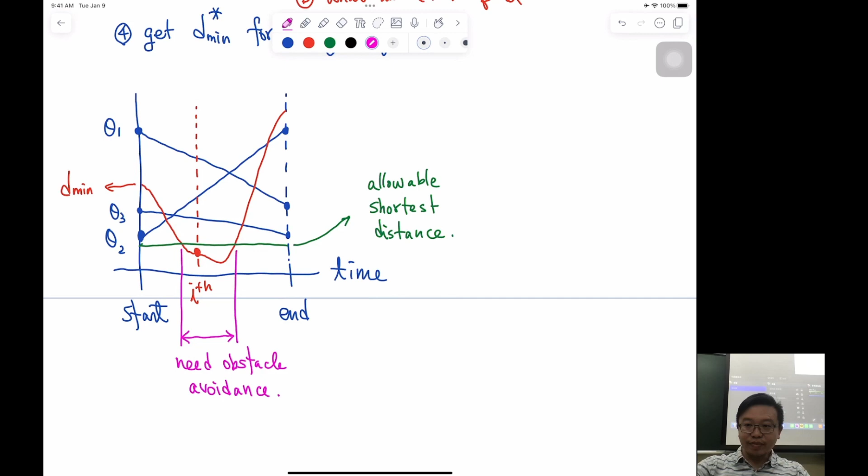Now I will switch to a PowerPoint.

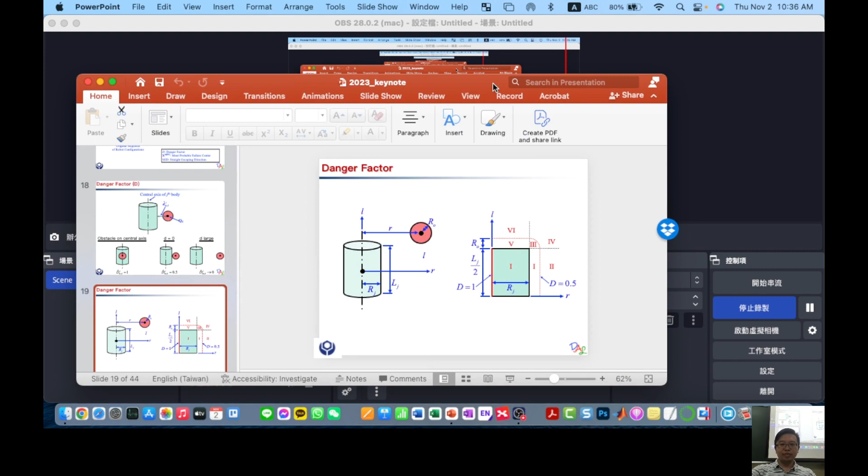I gave this presentation in a very interesting country called Latvia. If you have no idea what Latvia is, that was my first time there because I have an international project with them and also with Lithuania. It's a 3-country project.

What's interesting about Latvia is that they have no mountains. They have flat grounds, a lot of forests, no mountains. Our Latvian partners came to Taiwan this year after COVID and were so excited about mountains, they have never seen mountains in their life. Some of our partners went to Elephant Mountain one day just to experience mountain climbing. For us, it's boring, right?

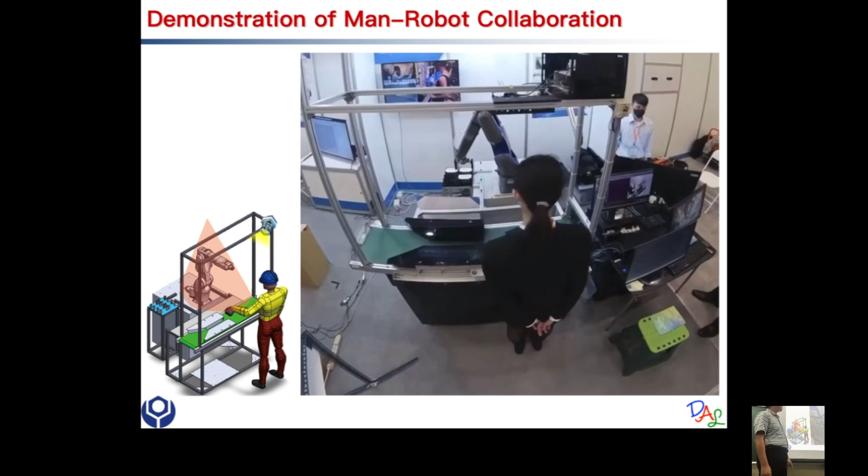It's a National Science and Technology Council project. In this project, this is a student from Professor Cao Longyang in industry management. We don't like to have boys as a model, just beautiful students.

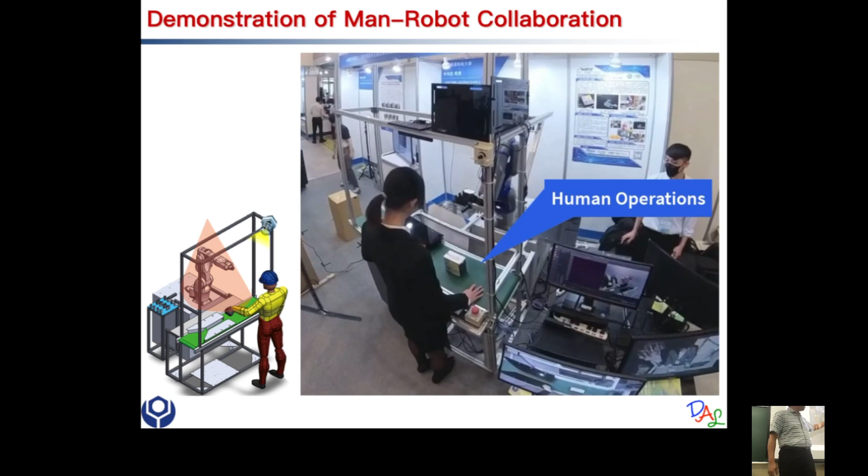The robot is picking up something and is supposed to drop the part in front of the student. She intentionally moved her arm to a certain spot so there could be a collision. From this video, you can tell the robot made a route around the student's hand, because when it realized there was an obstacle, the student's arm was considered the obstacle. Some calculation was done inside the computer, and then the robot was told to stop and move along a different trajectory.

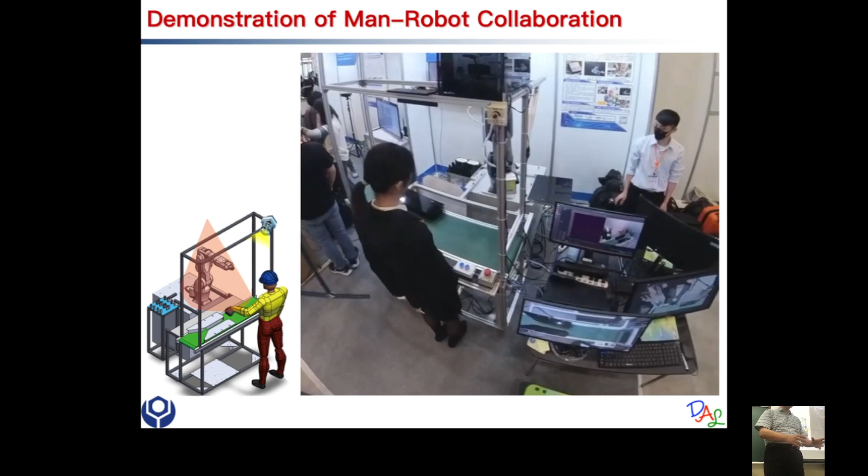For the rest, it's just the other part of the project. Our partner analyzed human motion and realized what is the right moment for the robot to join this collaboration. But to make sure this operation moves smoothly, we put some buttons here. We push the button so the robot knows when to come. Eventually, we don't want the buttons. We want this to be done with some kind of algorithm, so whenever the human completes a task, the computer should know and the robot will jump in and do the next move. But right now it's very challenging.

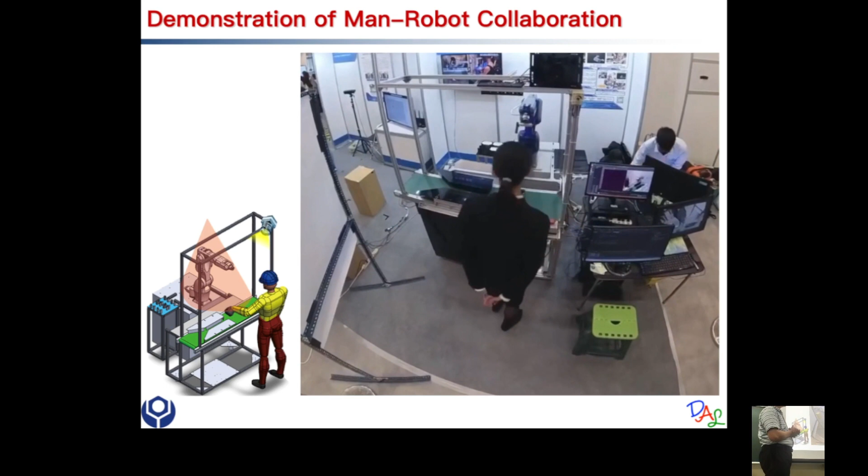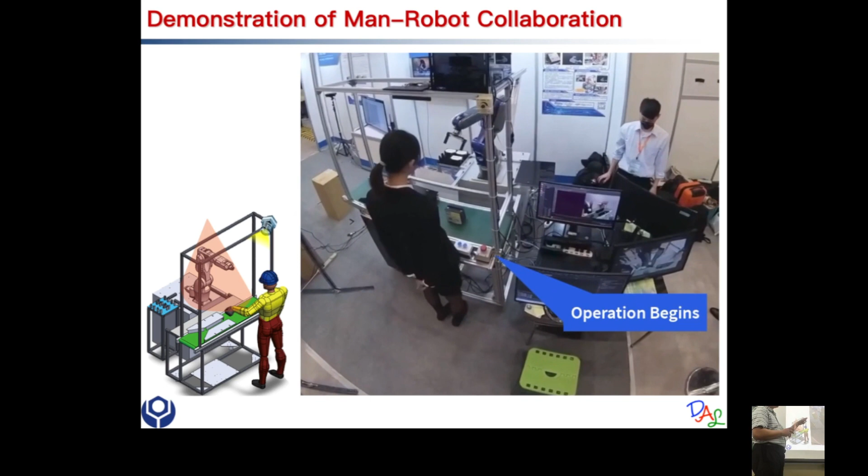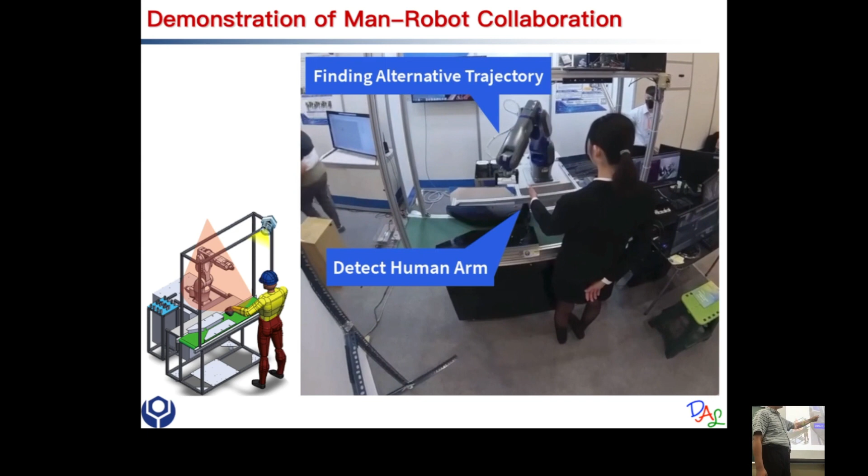Okay, let's see the obstacle avoidance again. I will show you when the robot realized there's an obstacle and decided to move around the student's hand. When she moved her arm forward, look closely, the robot stopped for a very short time and then took a new route. Within that short period, all the calculations were done. Look carefully, it stopped right there, and then took a new route. It was not a smooth movement because it realized, oh, there's some obstacle.

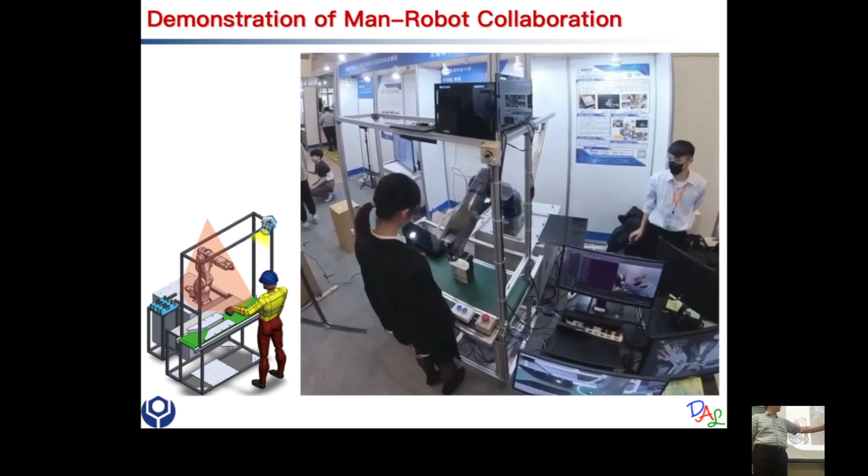Within this research, there are three parts. The first part was done by myself and my students, working on path planning with obstacle avoidance. The other part was done by Professor Chao-Lung Yang in industrial management, who used a camera to realize what the student is doing with human motion recognition. The third part is laser projection.

It's by Chang Ching-Yuan from Taipei Tech. He made one laser at the top. There is actually some laser indicating what the human worker needs to do, like a hint. But it was not clear in the video. If you are close by, you can see the laser. So anyway, this is what we have done.

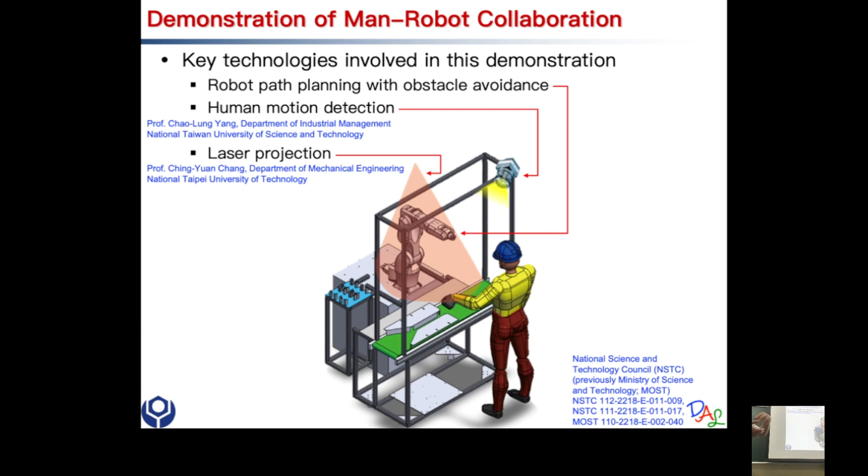Later on, when you work on the project, if you are interested in this kind of topic, you can let me know. I can find my graduate student to jump in and show you what's available and what you can work on.

This is actually the exact procedure I showed you earlier by hand, but this is more like a block diagram. Whenever you have a plan for motion, let's say moving from P0 to Pn, you need to detect whether there is an obstacle. Usually you have some sensor or camera surrounding the working environment, like what I showed you in the video. There's actually a 3D camera recognizing the 3D coordinates of the student's arm. When the arm comes in, all the coordinates are captured and tell the system that along the trajectory there's this particular obstacle.

So our system was basically doing the exact calculation I showed you. Once we compute every future configuration, if you move up to a certain point, you don't need to worry about what's in the past, you just need to worry about what's in the future. The computer is calculating every possible configuration in the future and the shortest distance between the configuration and the obstacle to check whether it's safe. If yes, continue. If no, you need to use something to replace the trajectory.

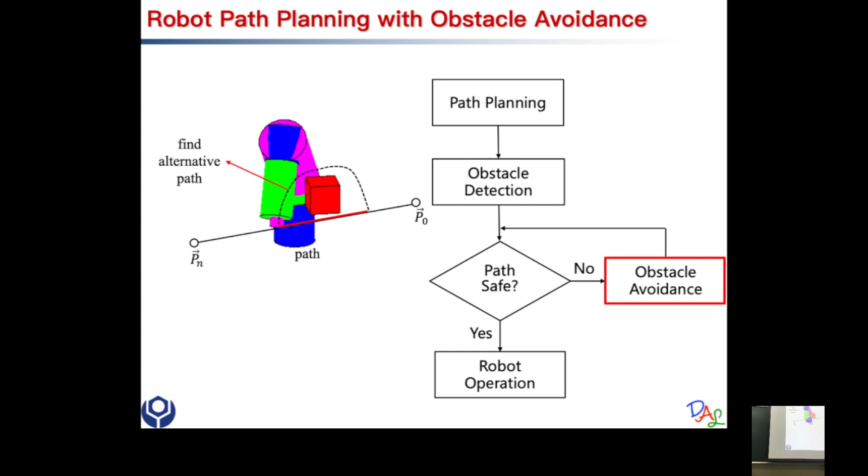Let me tell you what people have done in this field. There is one way, the so-called potential field method, with all kinds of potential fields. This algorithm can not only be used for robot planning but also for vehicle positioning. It's very commonly used, this potential field method. Of course, the assumption is you need to know where the obstacles are.

Those are obstacles, and you have a starting point here, and an end point. So you know all the coordinates. Now, the most straightforward movement is to move straight, right? And as you can see, along this straight line, there's going to be a collision. So in the computer, when we try to do this, we already know there is collision.

Since we know the coordinates of everything, we assign some kind of potential energy on those geometries. They're like magnets—they have opposite magnetic fields, magnetic force, pushing you away from the wall. So when you are about to move up to here, that magnetic field pushes you toward the other direction.

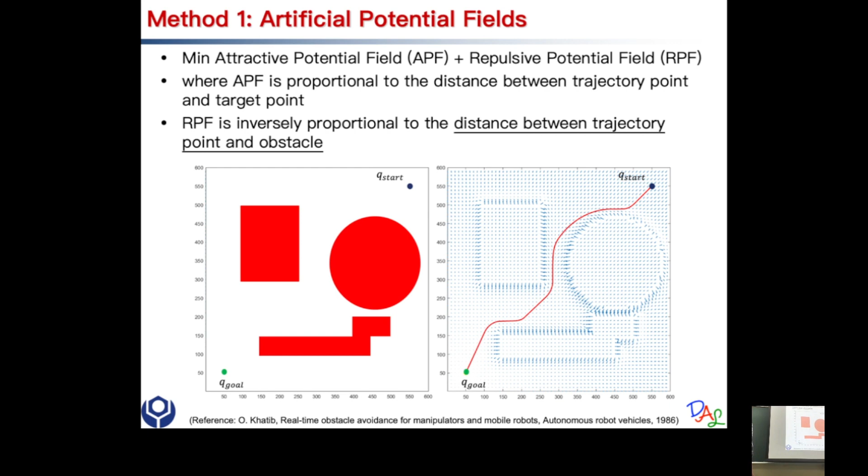A different way is called Dijkstra's algorithm. It doesn't require you to move along the entire design space. It's a flood exploring algorithm. It's like pouring water from the entrance, and the water started to explore until it reaches the target, like a flooding. Once it reaches the target, the computer will figure out how many steps it has been taken. There is one trajectory or multiple trajectories that took the shortest path. Then move along that path.

What's the issue of this? Whenever you explore, you are checking every position, whether that position is safe or not. Whenever you are checking if it's safe or not, you are checking the shortest distance. So every red point requires one time of shortest distance measure. That's also a lot of calculation.

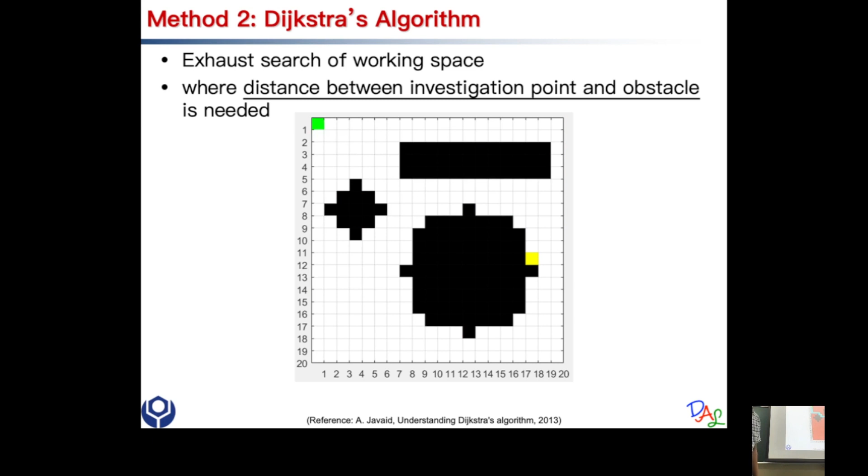The next method is called A-star. It's an improved Dijkstra method. In A-star, they don't try to explore everywhere. Whenever they take a move, in this 2D space, you basically move forward or move left. They have some calculation to decide whether forward is better or left is better. They will decide one, so they always move along one direction.

Up to here, moving this direction makes more sense because it's closer toward the target. But whenever it's bumping into an obstacle, then you need to explore more. Over here it's actually exploring more, some extra exploring, more like a Dijkstra. But it doesn't overdo it. You only explore the space close to the possible path. And even doing this, you are still checking shortest distance.

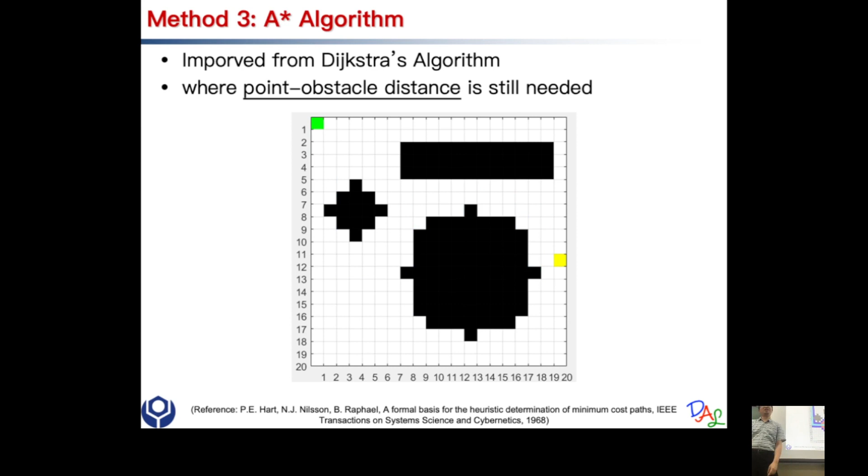From here, people started to try different ways. They try to use a random procedure. This is so-called a probabilistic roadmap. What did they do? They basically assign random intermediate points in the space, just randomly assign them, and then try to connect the dots. They don't connect the long ones, they just try to find the closer ones surrounding every point and then try to connect them.

Whenever they connect those straight lines, they start to determine whether on a specific line collision is going to happen. Over here at the bottom, that yellow point is not a good point because that causes collision, so that one will be removed. Once you have some kind of network that allows a connection between the starting point and the end point with zero collision, then pick up the shortest distance.

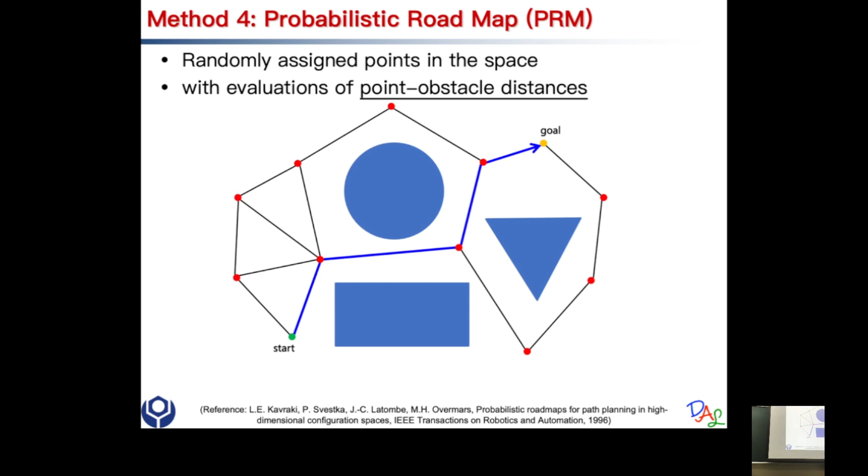So someone came up with this newer, more advanced approach, so-called RRT, Rapidly-exploring Random Tree. The two most famous methods in path planning are A-star and RRT. A-star is easy, RRT's procedure is more complex, but it's quite efficient.

They don't explore the entire space anymore. They start from the starting point and just explore the neighborhood. If there is a bad path, eliminate the bad one. And then you don't pick up the one that's over a certain limit. Like earlier, this one collides, even if it's inside a certain allowable region, it collides with the obstacle. This one is eliminated. This one is outside. You don't want that, you just want to explore the neighborhood.

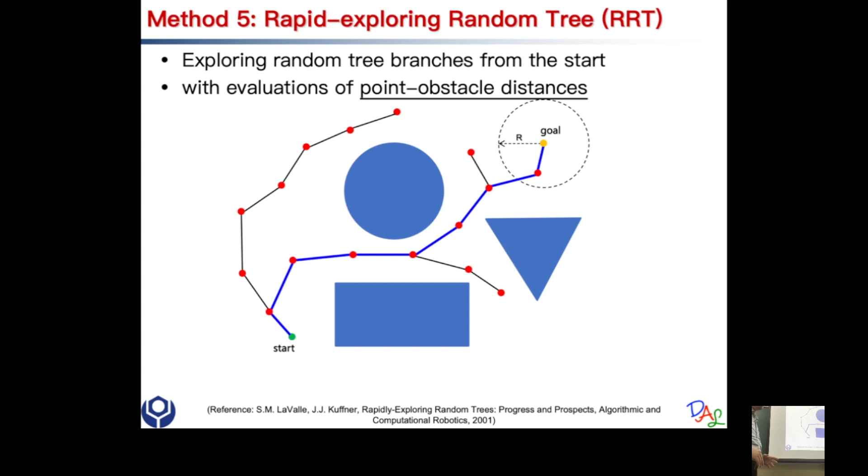So keep on doing that. You could have small branches until you reach a certain area where a point is close to the target, within a certain range. Then you connect the target with the end of the branch, so you find a complete trajectory. Researchers believe with this way, you don't need to explore too large a space. You can go through a smart trajectory.

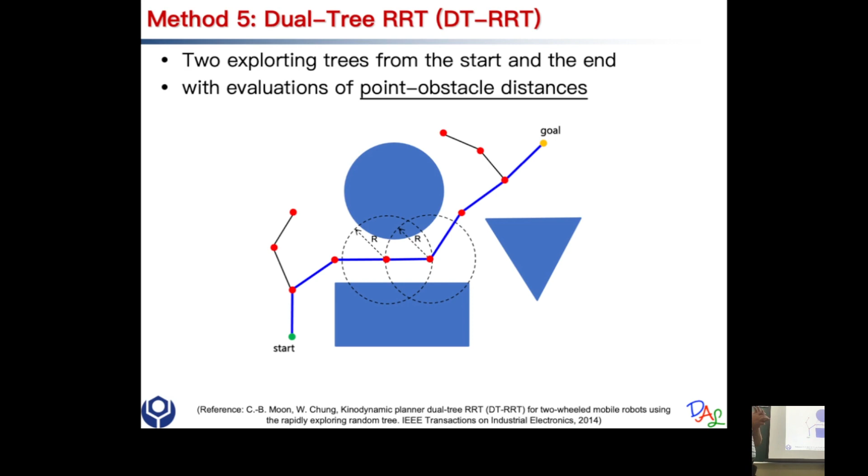Then someone tried a dual tree RRT. Same idea, but they have two branches starting from both the starting point and the end point. Until both branches have a single point closer to the other one, then they connect those two neighboring points so they find a complete trajectory. They believe this dual tree RRT allows you to explore lesser space. You don't want to explore the whole world, you just want to explore what's possible.

Okay, now I would like to introduce what we did in our lab. There's a reason why we don't use A star or RRT. A star is more like an exploring algorithm. It's like you don't need intelligence, you just need to explore, just find a more effective way of exploring. And for RRT, it's based on a random process.

My research field is about optimization. We don't like random process. My advisor and my advisor's advisor, we never use random. We don't like to use random points. We would like to derive

algorithms that help you find a solution. So if you want to know more about what I'm planning to do, you need to take my optimization course. If you've done it, basically the difference is there's a bunch of algorithms based on so-called gradients. The other ones are based on random process. We don't use random process.

Only the weak students use random process, like a genetic algorithm. When you publish a paper, if you use genetic algorithm, the other group of people will think this is nothing smart. So we want to develop something that's smarter.

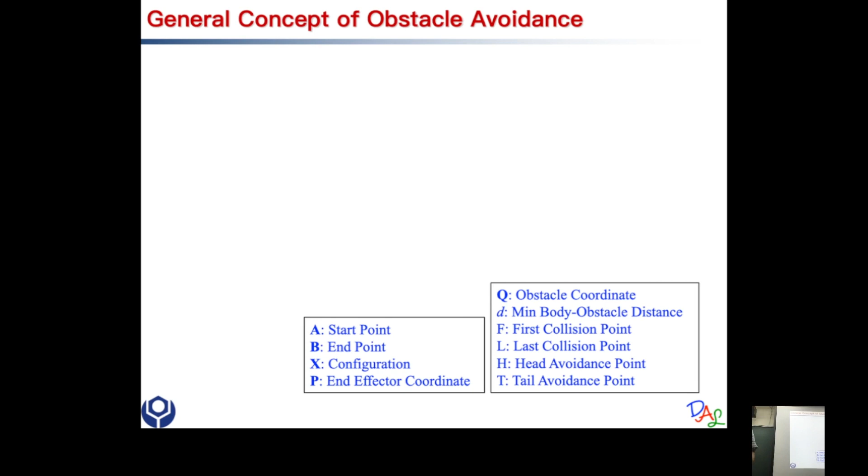Okay, so in general, you are moving from this, basically P0 to Pn. And it's a general configuration, so the robot can have any shape. This is the jth body, like I said, and this is the coordinate of the end effector. X represents the joints, a vector of joints, basically the configuration. So let's say there's an obstacle Q on the way.

At a certain moment when your robot configuration has the first contact, I'm calling this the first collision point, so F represents first collision. The robot keeps moving until it reaches a certain configuration like this, and if this is the last configuration that has collision, the next moment it moves, the collision finishes. So I have a first point and a last point.

So I define this as a robot collision region. We want to avoid this part. However, if I move my robot up to here and start to make turns, you already have tangent contact. You don't want that. So in our research, we usually find a configuration a little bit earlier, away from the collision.

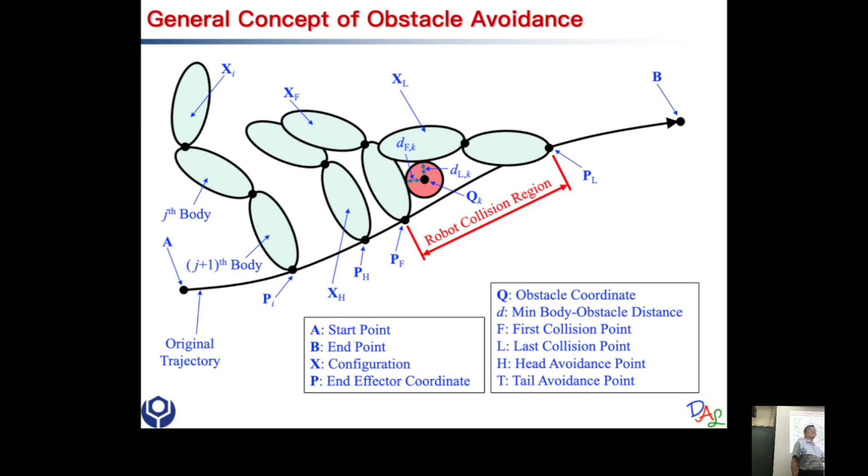Because we already used first and last, over here we use head and tail. So this is the head point to avoid the collision, and then we find a tail point. This is the tail point, head and tail. So we define this region as the obstacle avoidance region.

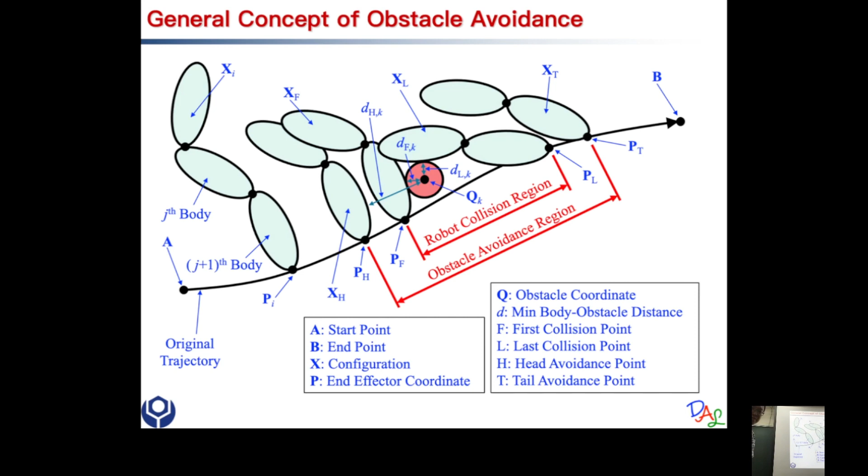If we are able to find a trajectory that is away from the danger region, we won't have contact, and also we can move around it. So let's focus on this obstacle avoidance region.

Over here, we pick up some intermediate point here, some intermediate configuration. The idea is that we basically want to find a newer configuration from here to here. So here is not safe, here is safe. If you can choose multiple points here, then you can find multiple newer configurations above it, then you can just connect them.

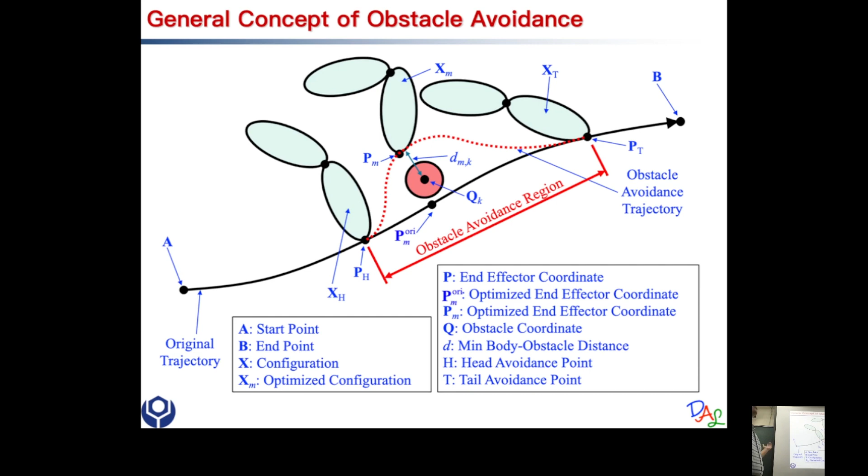So that was the idea. We focus on one configuration and find a safer one to replace it. Okay, so that's the goal. If you can find one, then you can find a lot of them, just connect them later on. So from now on, we are going to focus on just one configuration within this obstacle avoidance region.

Now here's the trick. We don't want to deal with the end effector coordinate anymore. From now on, when I do any analysis or optimization, I stick with the configuration coordinate, basically a vector of joints. Why do I do that? Because I don't want to do kinematics anymore. If I use the end effector coordinate right here, then in the later analysis, I need to do inverse kinematics

for x and then forward kinematics for p. I will need to do this back and forth so many times. I don't want to do that, that is wasting some time. So let's focus on the design coordinate with x. If it works, I never need to do kinematics anymore. So the idea is I need to find a newer point right here to replace this one. But this one was a good one, the only bad thing about it is that it will collide with the obstacle.

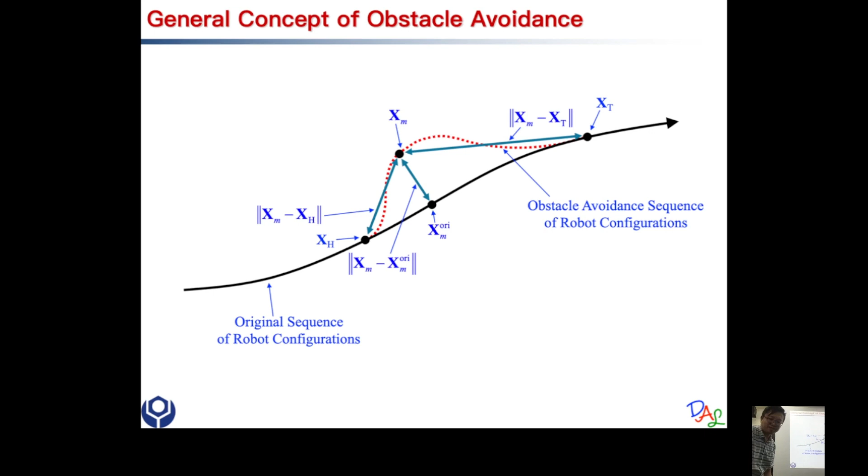Basically, that's a lot of math, so don't worry about some of the math. Basically, over here, that's where it's dangerous. So we want to evaluate something called the danger factor. The danger factor is going to be calculated by the shortest distance.

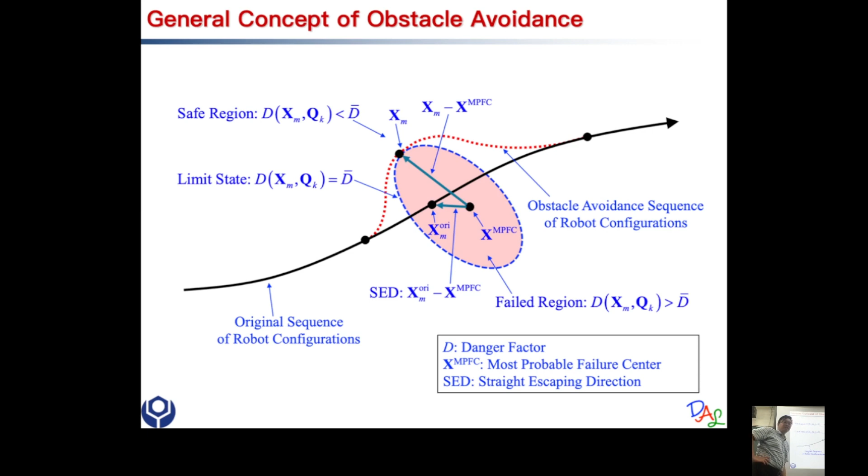I want the danger factor to be small enough. If it's too high, we believe it's dangerous. So I will tell you about the danger factor. So it's the exact same analysis that I did, but this time I choose to use the so-called danger factor.

There's a reason. Because robots may have large ones or small ones. For large ones, maybe you are in a different scale. The large ones could be 2 meters tall. Small ones could be 50 centimeters tall.

So when I apply a general method to robots with different shapes, I want a unified unit. I don't want the analysis to be affected by the size. So usually when this situation happens, sometimes we would like to normalize our values. We choose to define a new value called danger factor.

Whenever the obstacle is right on top of the center axis of the cylinder, we say this is 100% dangerous. So danger factor equals to 1. Whenever the obstacle has tangent contact with the cylinder, even it's like this, or corner points, or on the side, whenever it's like a point connection, we say this is 50% dangerous. When it's away, 0 dangerous.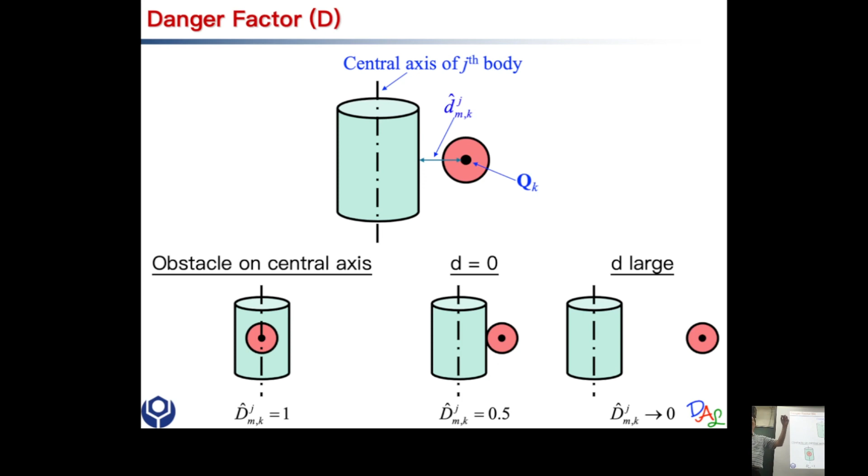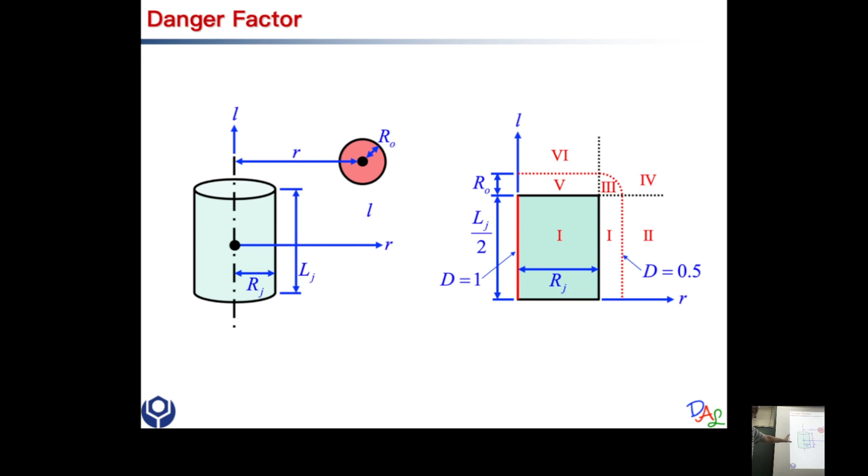So if we can model this danger level with values from 0 to 1, it's a unified number, no unit. It's just a percentage. So basically, exact same calculation, but over here we need to cut into 6 regions, unlike what I showed you earlier. Because we did some math to realize the danger factor has to be written in certain equations.

It's more complex than the one I showed you. The handwritten one is a simplified version. This is a more complex one because of the danger factor. Okay, so what's this?

That's how the danger factor changes when the coordinate of the obstacle changes its coordinate. So I would like to show you what this means. So this is an exact drawing. If the center of obstacle is on this red line, danger factor has to be 1, right?

So pay attention on the coordinates, the L. L is the axial direction of the cylinder. So L in this figure is right here. So here is L. So this edge is representing this red line. Okay, up to one half of LJ. This is 1/2 of LJ, right? Up to here, within this range.

And R equals to 0. This is R equals to 0. So over here, this is like the obstacle staying on the central axis. And like I said, I want this danger factor to be 1. So these are danger factor equals to 1. Okay? And when the obstacle center is staying on top of the red dashed line, we will have point contact with the cylinder.

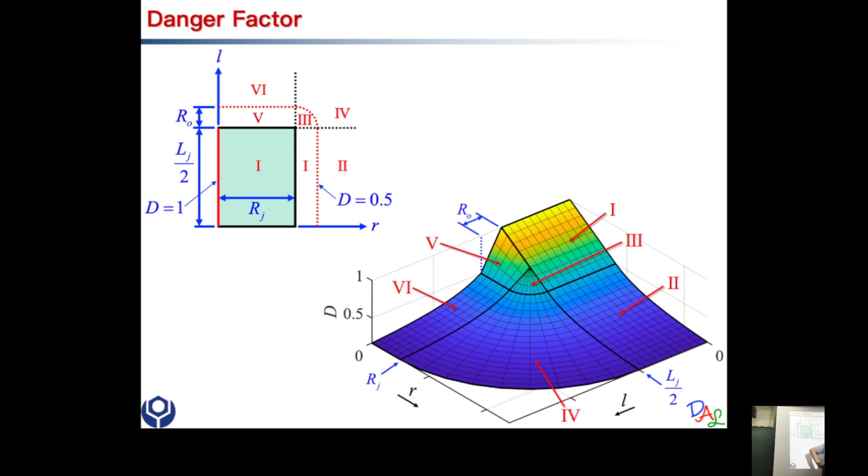So we designed this danger factor within 6 different regions with those equations. We try to make this danger factor as a smooth function. But it's not completely smooth because we have some corners right here. It's not good for derivative, I know, but it works okay. At least this function is well defined everywhere.

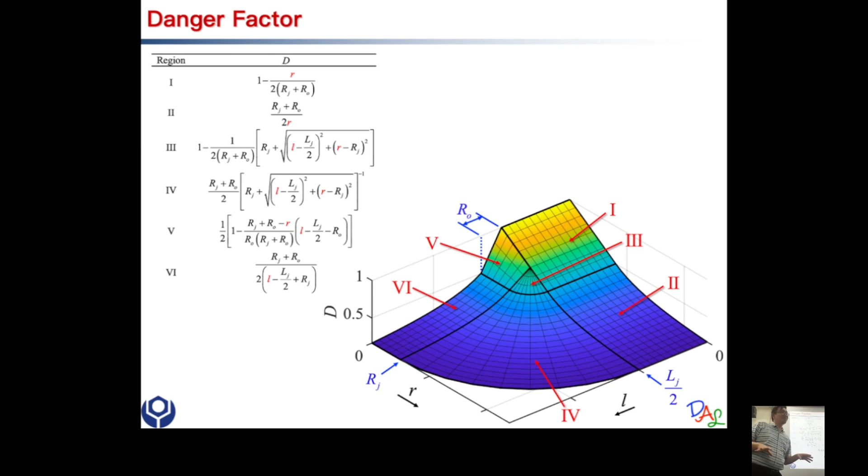So no matter where your obstacle is inside the design space, no matter where your robot configuration is, you can find the RL coordinate of the obstacle and the jth cylinder, and then plug in one of the equations, then you know the danger factor. Okay, that's what was done.

And then it's about optimization. So if you haven't taken my optimization class, this is for your future. Take my optimization class, then you know how to do it. So we want to minimize this distance, minimize this, and minimize this. ST means subject to. Subject to means 受限于, so basically limited by. Minimize these 3 things, but limited by those equations.

One constraint is your danger factor has to be smaller than an allowable value. If it's greater than 0.5, collision happens. You can set it as 0.4, so you will be keeping a safe distance away from the cylinder, because 0.5 is like a point contact, 0.4 is a little bit far away. So usually we use 0.4.

And your joint angle is limited by its largest angle and the smallest angle. Okay, and like I said, we formulate 3 equations. We want them to serve like magnets, pulling the design point closer to the original one, but keeping the safety level.

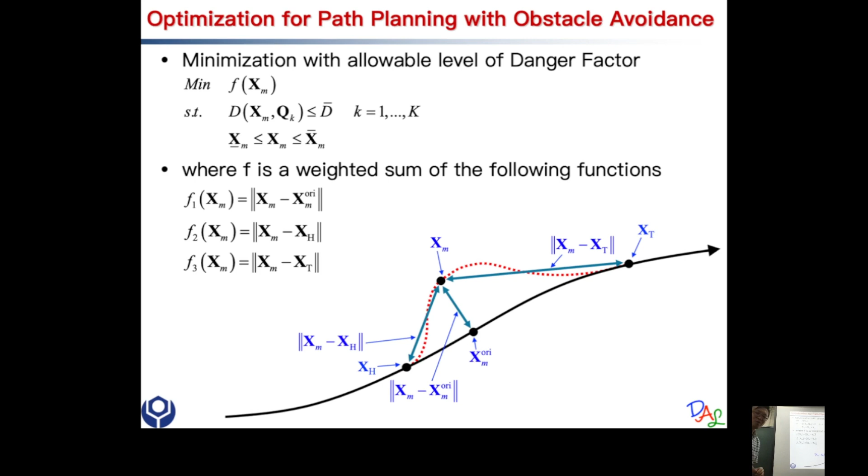So formulation-wise, I believe you can easily understand, but mathematically, you may not be able to understand. I'm going to show you, but don't worry. There's something called Lagrangian. This is so-called the objective function, this is a constraint function, this is actually one constraint function, the other one is another constraint function. This is called constraint optimization.

It's difficult to solve for constraint optimization. It's easier to solve for unconstrained optimization. So there's one way to put constraint functions together with the objective function. It's so-called the Lagrangian, so it's like a weighted sum. Sum them up with some weights. Those weights, 权重, are called the Lagrangian multiplier.

You may have heard of Lagrangian multiplier. What are they? They are the weights, 权重, in front of the constraint functions. So you just need to put them in the constraint with some weights. Okay? So this formulation is called the Lagrangian.

But it's not easy to directly put them in the objective function. When you take a look at this, d minus d bar, forget about this, must be smaller than 0, right? But when you want to put this in Lagrangian, you need this to equal 0, cannot be smaller than or equals to. So we introduce a new variable. S squared is always positive or 0. So if this whole thing equals 0, this value is either 0 or smaller than 0, right? So if this is 0 or smaller than 0, it's equivalent to its original equation. So we introduce something like this to make this equation equal 0.

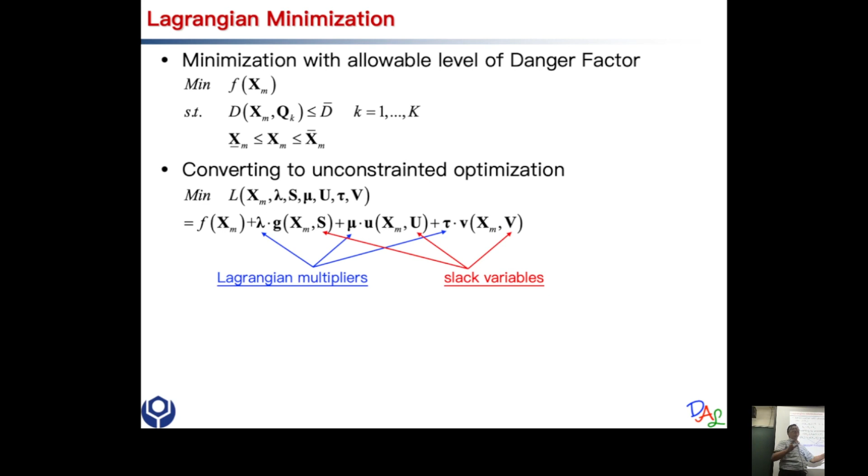This is only how you can put it into the Lagrangian. Whatever you put right here are called the slack variables. I don't know why they call them this, they're just names. Okay, if you don't know this, it's fine. I can give you the slides, but you can try.

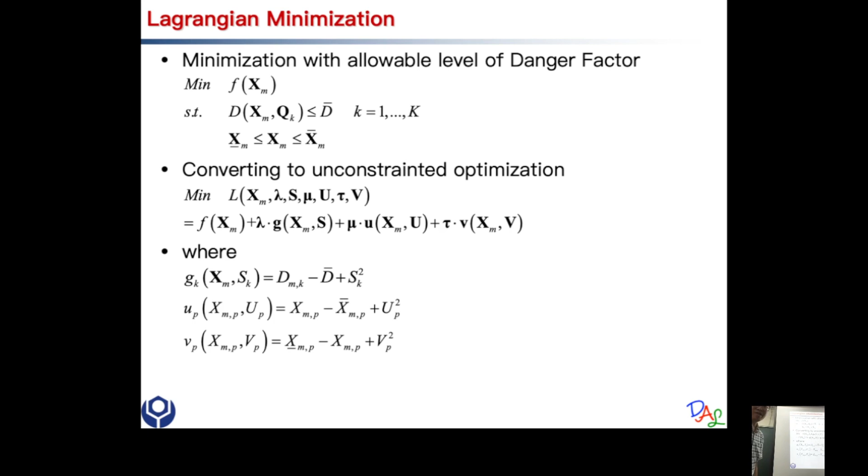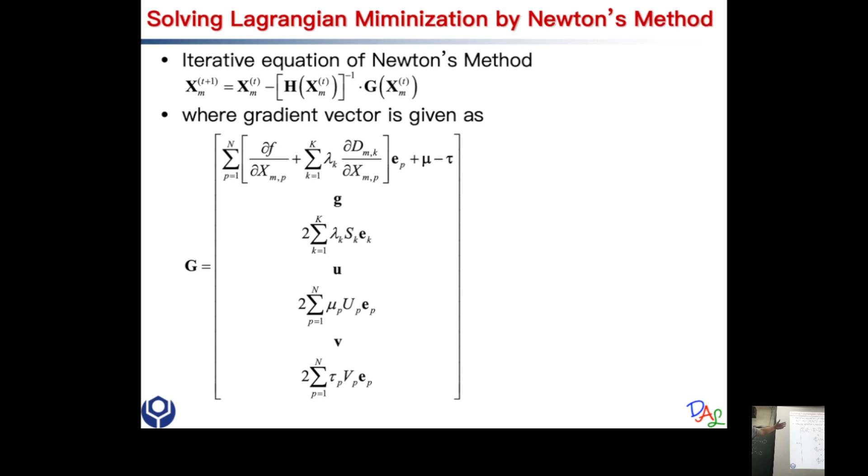Yes, this is a Hessian matrix. The gradient vector looks like this. If you're interested, you can take my optimization course, and I'm gonna show you the Hessian.

Anyway, we can solve it. So the entire procedure looks like this. You want to move from A to B. You determine all the coordinates during the trajectory, during the path. You determine all the configurations.

You check whether it's colliding. How do you check? You plug into the danger factor that we developed for every possible configuration. If yes, there's gonna be collision. Determine what is the first collision point and what is the last one.

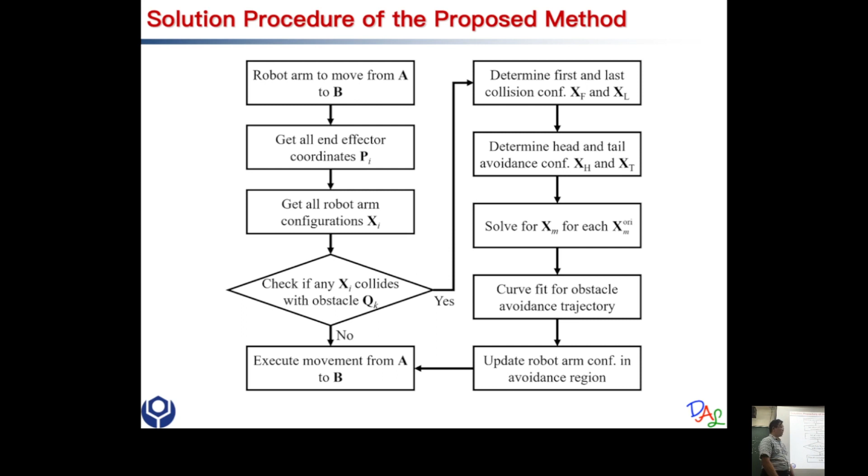Then move wider, choose a head point and a tail point. That's where you want to do obstacle avoidance. Within this range, choose several more intermediate points. Solve for the optimization that I just showed you. And then you will have newer points, connect them. Then that's the avoiding trajectory.

Now, time for animation. So here's one robot, and the red box is an obstacle. Originally, it is supposed to move like this, okay, from right to left.

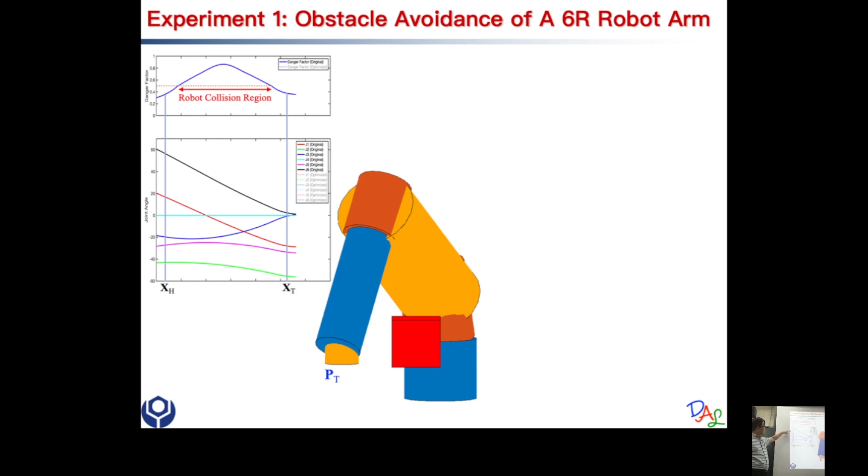Along this path, this is the joint angle. I have drawn these figures for you earlier. Take a look, we have six joint angles. At the first point right there, the 6 axes are shown right here, different angles. Along the path, it's gonna move like these. Some are straight lines, some change a little bit, and some even move like a curve.

Because when my student did it, I think he chose to move along the straight line. So if the end effector is moving along a straight line, you know the angle is gonna change like curves.

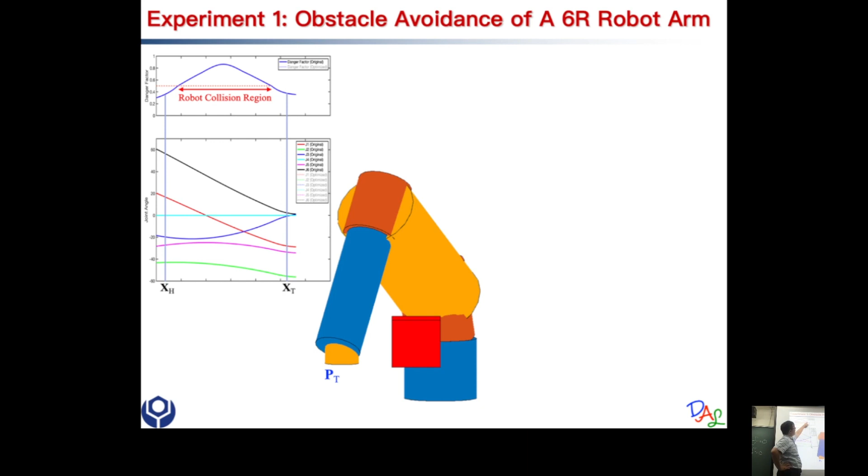However, we evaluate the danger factor. The red dashed line is the level of 0.5. As you know, 0.5 is collision. So the danger factor up to here becomes greater than 0.5, and then it's gonna collide, just like how we evaluated right there. So if we take a look at all intermediate points, we chose 3 of them.

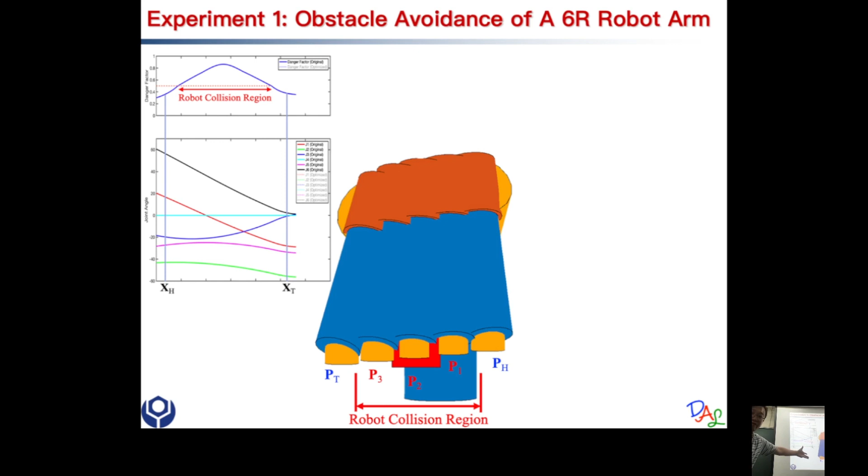Now we want to perform optimization to find better intermediate points. So this is where we want to avoid. So focus on the first point.

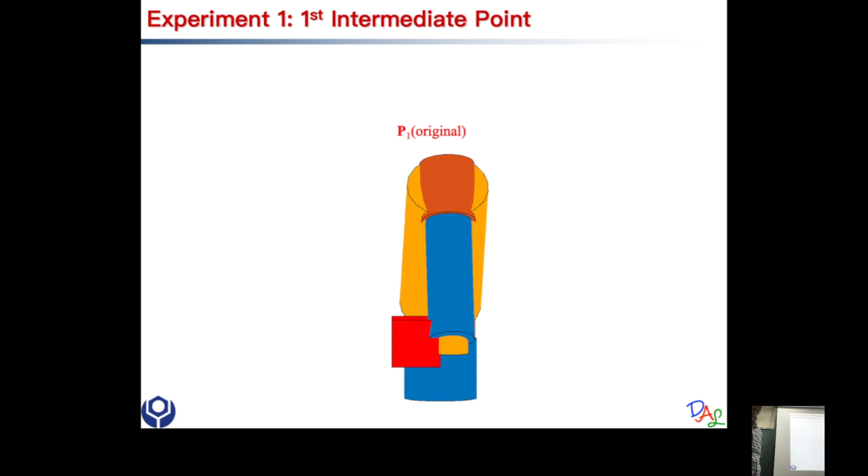We use the optimization, Lagrangian formulation, Newton's method. During optimization, usually it's an iterative process. So the solution is gonna be moving around until it finds a good one. I'm gonna show you the iteration: first iteration, second, third. Oh, that's optimal. We found optimal, a good solution right here, which is close to the original one, but keeping

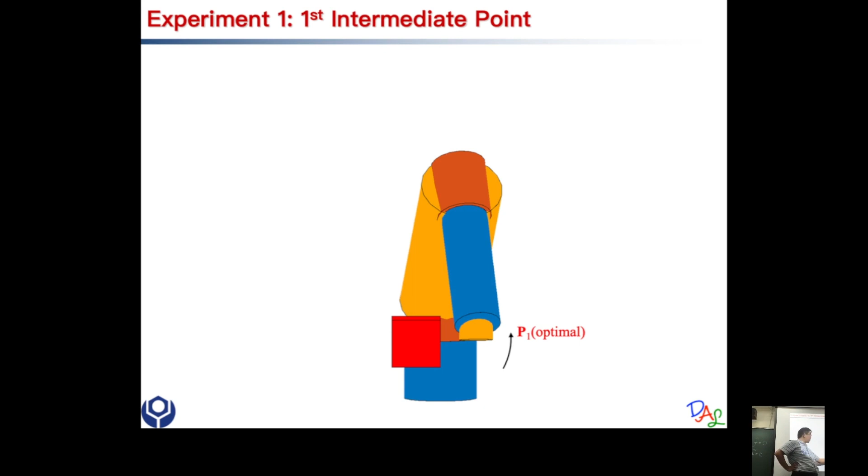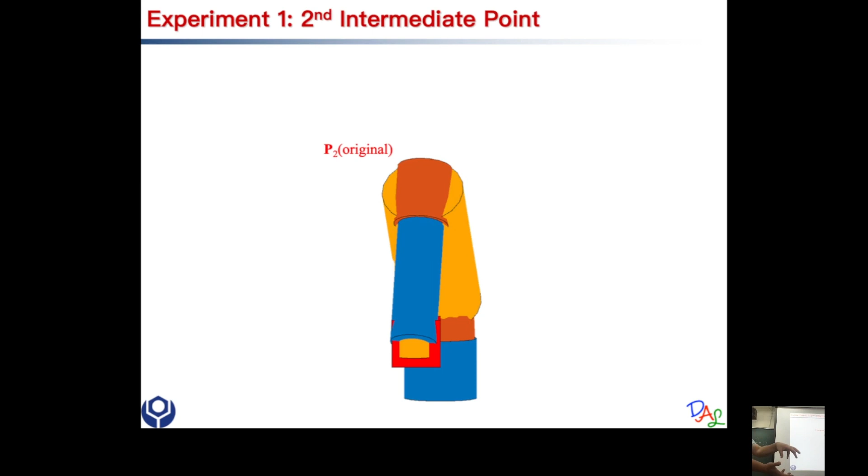a safe distance. Okay, let's take a look at the second intermediate point. Over here, it was colliding with the obstacle. With optimization: first iteration, second, third, optimal. So we found optimal solution right here. Again, close to the original, keeping a safe distance.

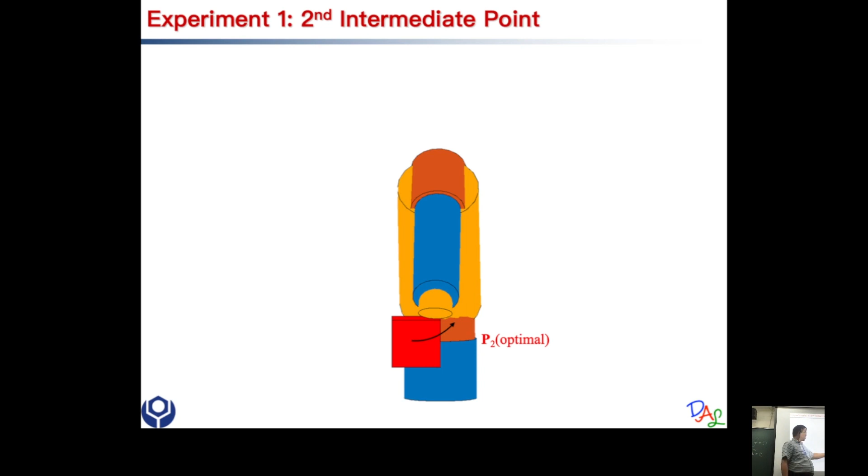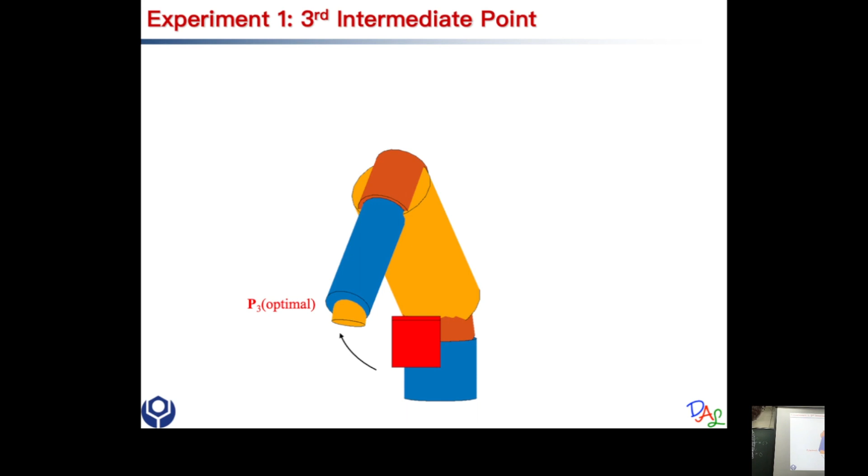The third intermediate: first iteration, second, third, optimal. So that was purely done by math. We have no idea how, basically. Mathematically, Newton's method proved if you have that formulation, this is the solution. So overall, this was the original path.

This is a newer path. So in fact, it moves like this, just like how a human would like to avoid the obstacle. And I'm showing you the dashed lines. The dashed lines are the improved ones.

Over here, like this particular joint, the black one is the sixth joint. It has to move along a new trajectory, and all these are determined by Newton's method. And the blue one is the third angle. It has to move like some new trajectory, determined by the algorithm.

With the newer combination of the configuration, check out our danger factor. It's within 0.4. It has no chance to collide.

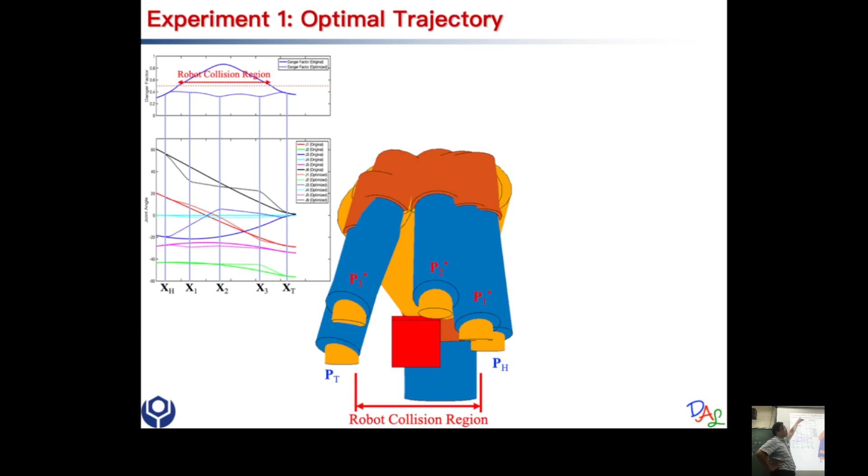And I'm showing you one animation. So the top one is basically the exact problem that I showed you in the previous slide. The bottom video is a different path. So originally it is supposed to move from top straight down, but there's collision, so it made avoidance from the side. Okay, so this is with the first brand of robot.

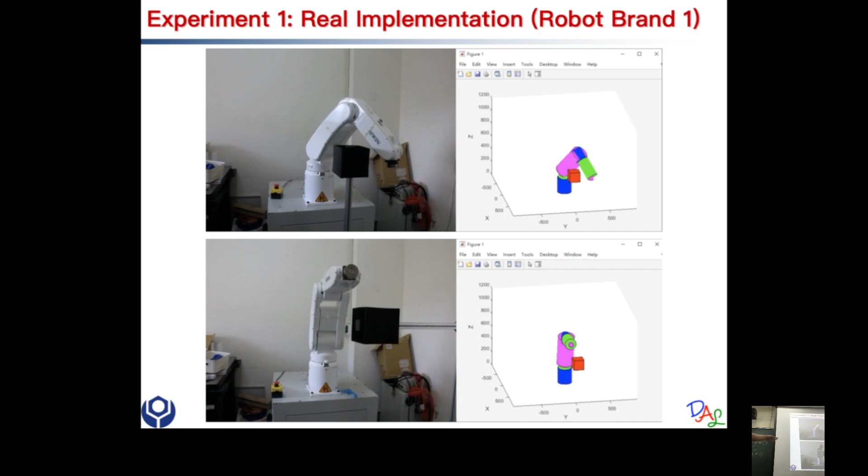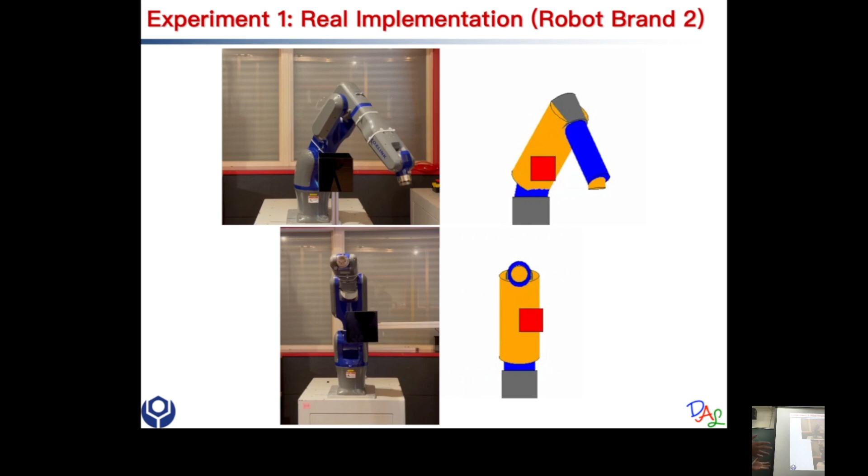We did the same thing for a second brand of robot. Basically, this method is general enough. No matter what brand of robot you're using, it works. You just need to update the geometrical information.

This is an interesting project. We work on an 8 degree of freedom robot. Usually a robot arm has 6 degrees of freedom, but this one has 8. We have a slider on this arm and this arm, so this robot is allowed to lengthen itself and then shorten itself.

Why did the company do that? Because sometimes they have something on a shelf they want to pick up, but the length of the robot isn't long enough, so sometimes they need to lengthen it. But they don't want the robot to be long all the time, because the working space becomes too far away, and sometimes you cannot reach somewhere closer. So with the ability to change the length, sometimes you can reach closer, sometimes you can reach further.

But when they design this, you have a greater degree of freedom. Now you have 8, but you only need 6 degrees of freedom, so you have 2 extra degrees of freedom. That means your possible solutions become infinite. You have an infinite number of solutions for inverse kinematics. So usually for this kind of redundant degree of freedom robot, finding the possible configuration is more troublesome than for a 6 degree of freedom robot.

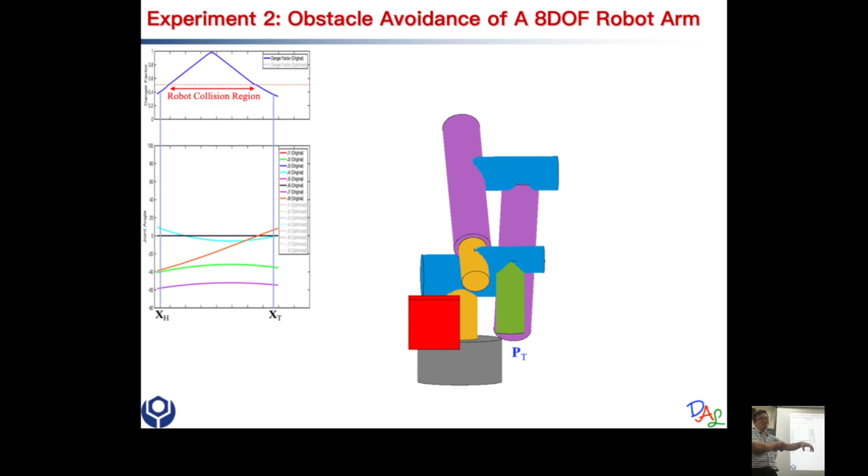So from here you can tell, along the path, the danger factor reaches very high. Some part of the body passes through the center of the box, so it's reaching close to 1. We want to avoid those.

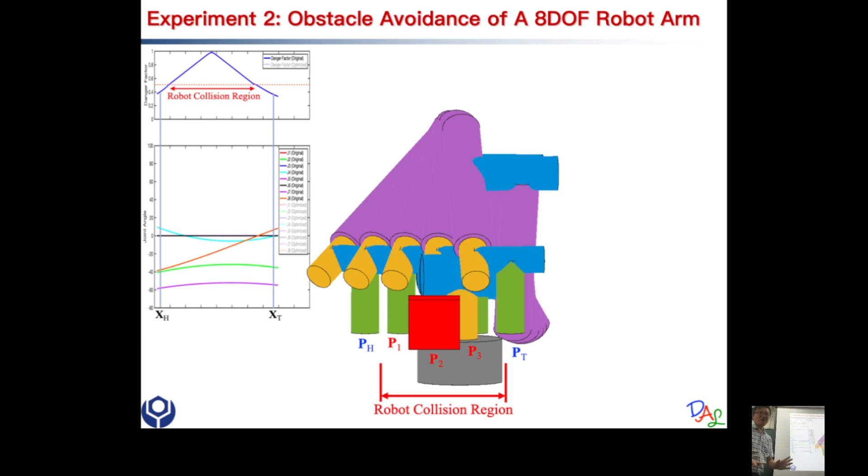Similarly, we use optimization to find a better point. And our method is general enough, we don't even care how many degrees of freedom we have, it's still able to do this.

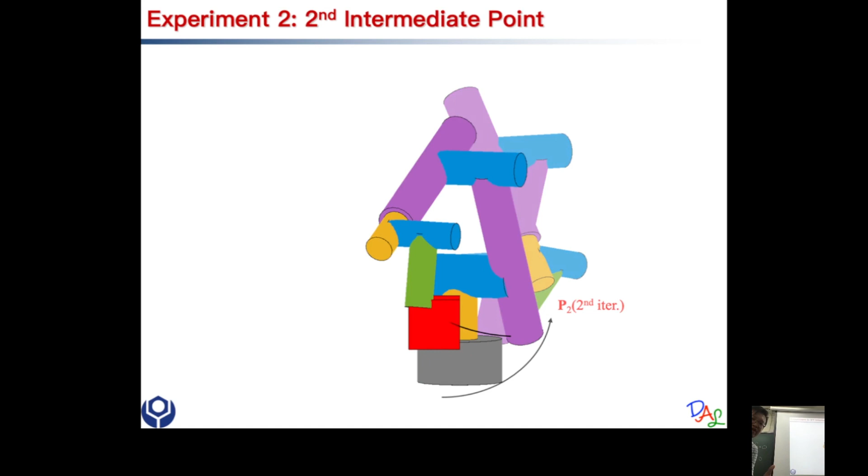So for iteration: first, second, third, fourth, fifth, sixth, seventh, optimal. This is the optimal one. Second configuration: first iteration, second iteration, third... this is fourth, optimal. Third configuration: first iteration... oh, that was optimal. So the third configuration finds the optimal more quickly.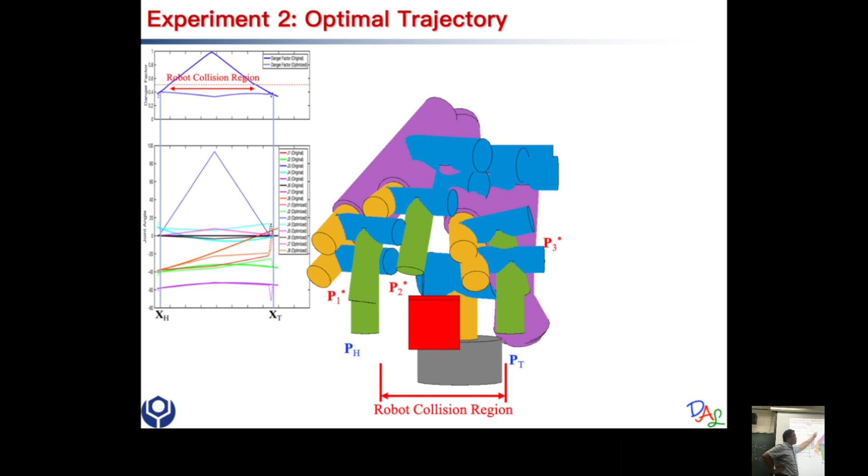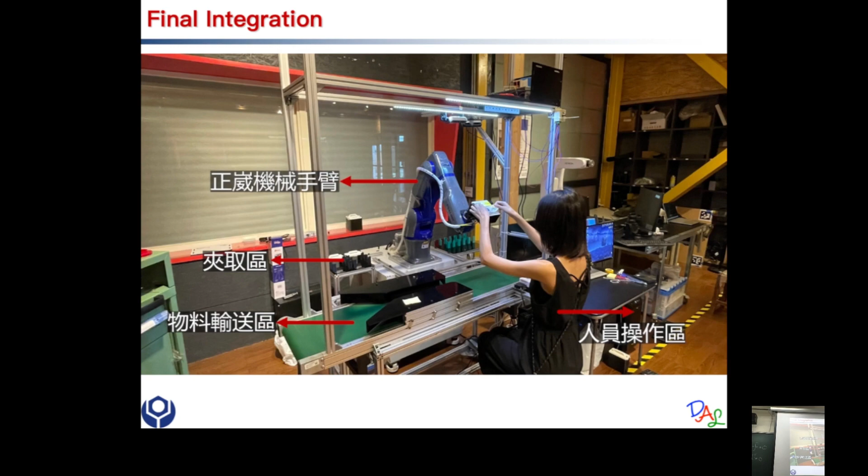This is another video to finalize what we did. So let's enjoy the video together.

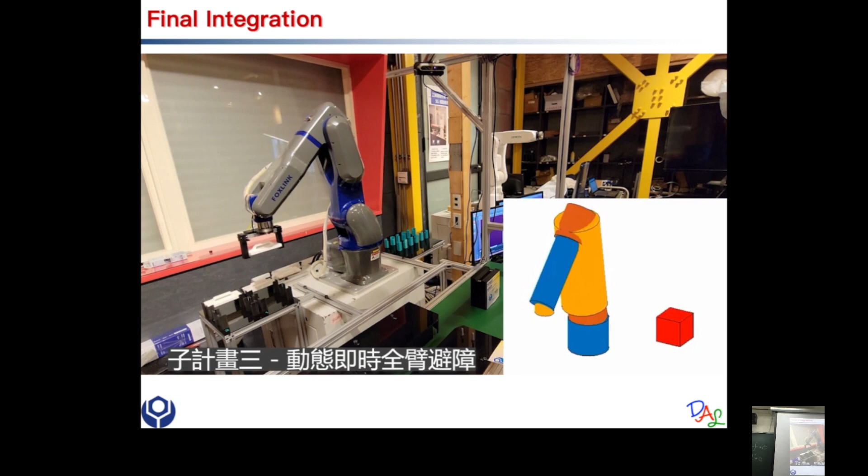Exact execution that I showed you at the beginning.

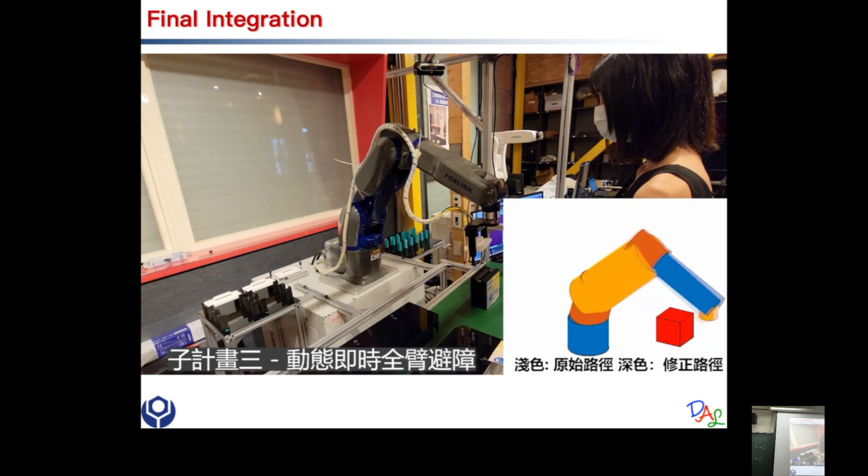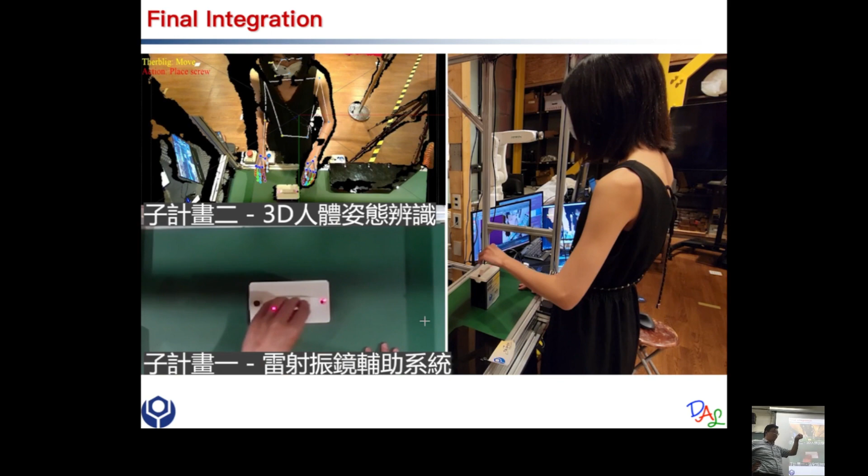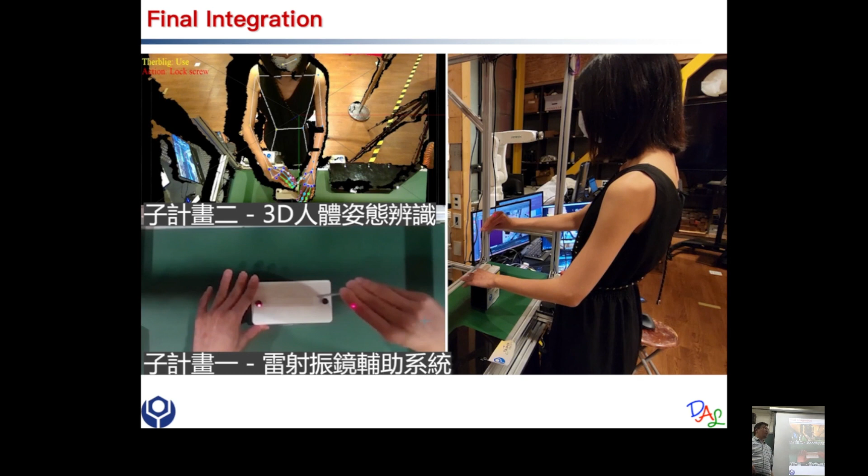So that was the laser that I mentioned. The laser is pointing at the position for the screw. Maybe you have a mechanical part that is large, with so many screw holes, then the laser can help the worker realize: okay, put the screw here and there.

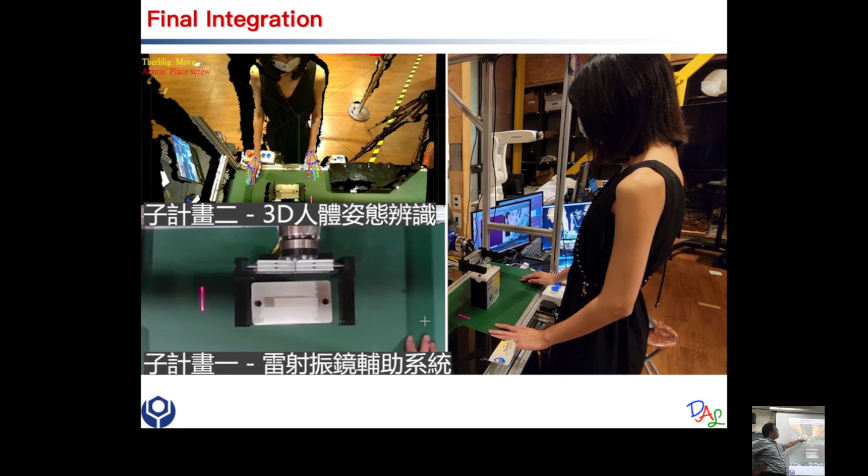And that was the human body frame recognition.

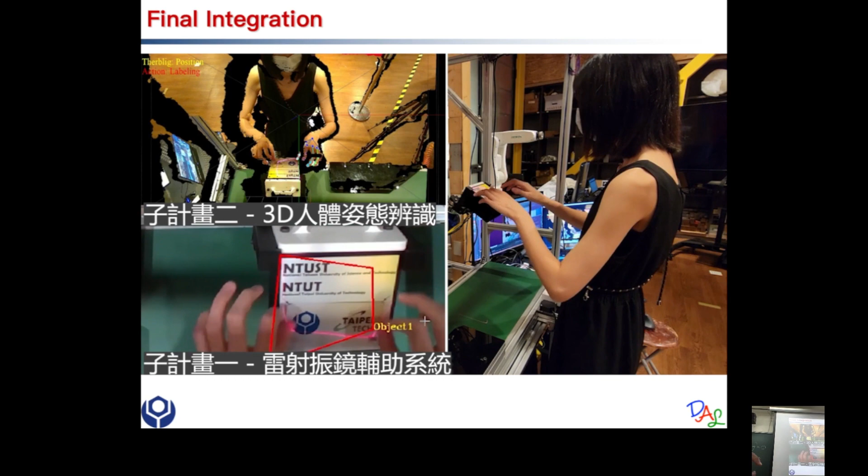Any questions so far? Do I need to assign homework? Do I need to assign homework? No? Not for this one, right? Do they need to write something about today's lecture? No? Up to me? Okay.

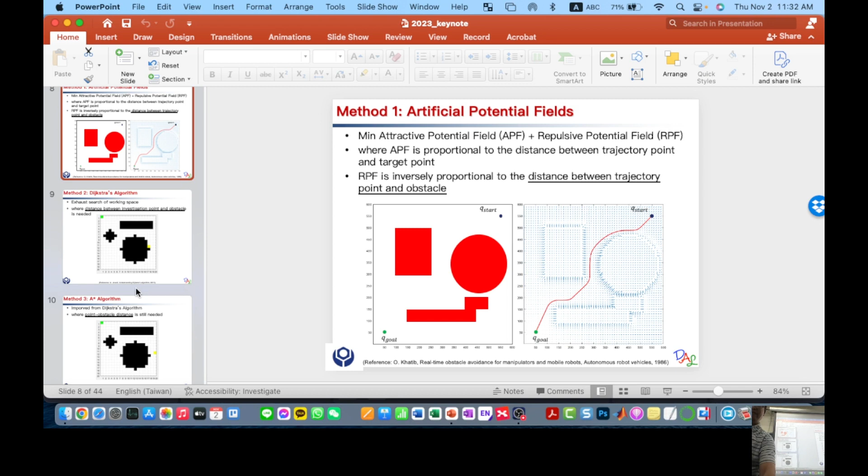Do you want to try to study path planning? But not the difficult ones, try the simple ones. For example, this one, you know, this is done by... this could be done by MATLAB, if you just consider a 2D space. If you have a starting point and an end point, and you have some obstacle, you can have a simpler obstacle like a circle. So if the circle is on the way, as you define your intermediate point, you realize your end effector is too close to the circle, so you can try to find a newer path. In my slides we have the potential energy approach, Dijkstra, A star, random tree. They could be quite easily implemented in MATLAB, if you just stick with a 2D problem, a simple circular obstacle, and randomly pick starting point and end point.

As for whenever a straight line from the start to the end has contact with the circle, what to do. I know you guys are in groups. Can we have a homework for today's lecture? You guys work in the group and choose one way you would like and try to implement obstacle avoidance in any way. The goal is whenever, based on whatever assumption or setup you choose, you need to be able to demonstrate a 2D space with some obstacle, a circular obstacle with random position, random radius, and random starting and end point.

Whenever the straight line has contact with the circle, what would be the path surrounding it? If this has to be done automatically, then it requires some coding. Work with your team and see if you can implement it. If your team cannot implement a MATLAB code, you want to try different codes, that's fine. If you just don't know what to do, you just want to download something from the internet, that's fine, it's just a homework. But you will learn less if you just took something from the internet. And if you download something and have no idea what that code is, it never works, and you just want to study for some method and give me a report, that's also fine.